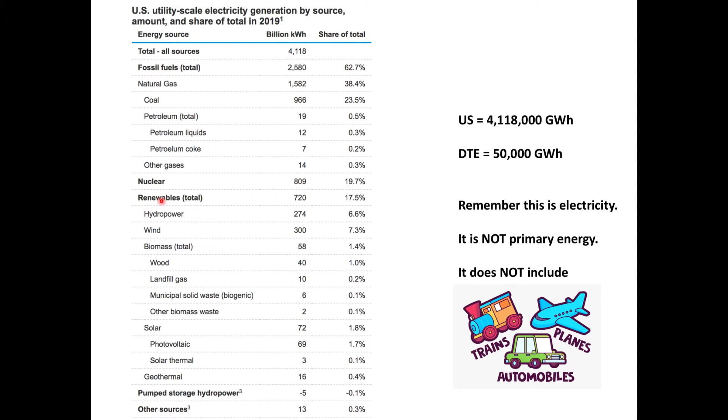So today I want to focus on nuclear and I want to focus on hydropower. And remember, one of the themes of these last few lectures in the class is that if you imagine a world that is truly independent of fossil fuels, meaning that we don't use any coal, any natural gas, or any oil as a primary energy source, just for electricity, we have to replace this 63%, which is a significant amount of energy that needs to be replaced, by either nuclear plus renewables, or according to the new Green Deal, no nuclear, no fossil fuels, and all renewables.

And if you notice, since about 1990, it has remained steady at about 20% of U.S. electricity production. And you can think of this as a plateau for reasons I'll go into later in the lecture today. One of the things that makes nuclear so challenging in the United States and other developed countries and developing countries is that on a dollar-for-dollar basis, nuclear is very expensive.

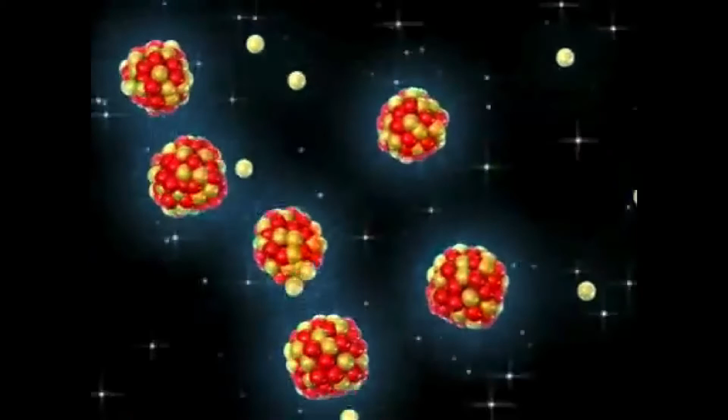Nuclear fission is the splitting of a heavy element's nucleus to form two new elements with smaller nuclei. One of the most important fission reactions is that of uranium-235, which is used in nuclear reactors and atomic weapons. The fission of uranium-235 is initiated when a neutron traveling with enough velocity collides with the uranium-235 nucleus. The collision produces U-236, which immediately splits into two lighter elements such as krypton-91 and barium-142. The fission event also releases 3 neutrons and energy. The 3 neutrons are capable of initiating more fission events if they encounter a uranium-235 nucleus. If a sufficient or critical mass of uranium-235 is present, the reaction becomes self-sustaining, resulting in the release of massive amounts of energy in the form of heat, light, and ionizing radiation, an atomic explosion.

So let me walk back through this. And we're going to start here by looking at a uranium-235 atom. And I just want you to keep in mind the 235 refers to the total atomic mass, the number of protons and neutrons within the nucleus of uranium, the electrons effectively having no mass that is measurable. And what happens when a neutron from outside uranium-235 is forced into the core or the nucleus of a uranium-235 atom is that immediately the overall number of neutrons increases, and that causes the new atom uranium-236 to become instantaneously unstable, and it disintegrates or radioactively decays or breaks apart.

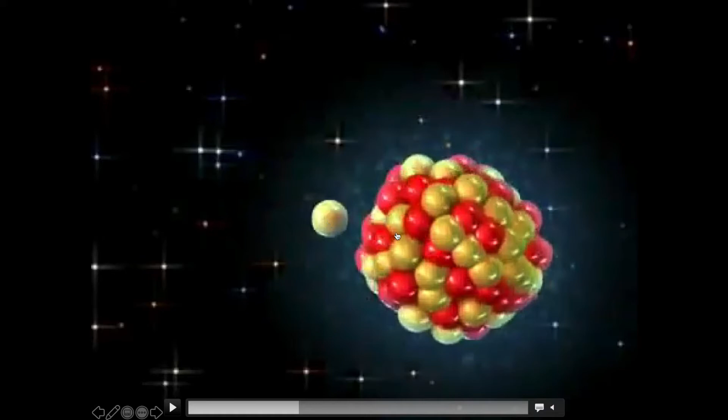Now, if you can remember hearing about Albert Einstein and his famous equation E equals mc squared, what happens when the accelerated neutron is forcibly injected into the uranium-235 atom, creating uranium-236, is that uranium-236 immediately radioactively disintegrates, and 2 new atoms, one of which is the element krypton, and the second is the element barium, are formed, and 3 neutrons that were originally in uranium-235 are released. Now, according to Einstein, E equals mc squared. So when this reaction occurs, the mass of krypton plus barium plus these 3 neutrons is less than the original mass in uranium-235 and uranium-236. So that means that energy is liberated during this radioactive decay process.

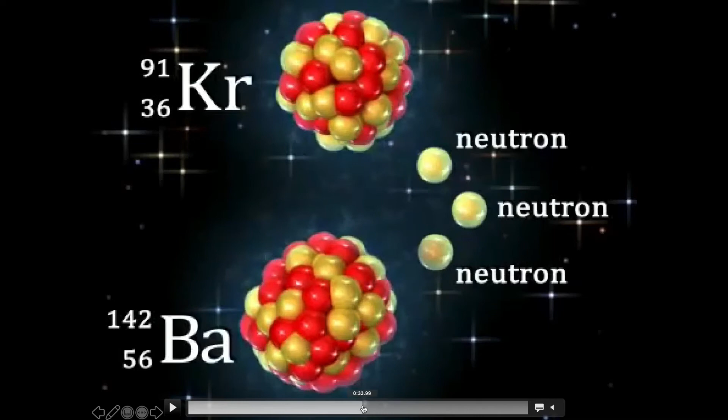These 3 neutrons then are free now in a nuclear reactor to interact with 3 more atoms of uranium-235, which then produces more krypton and more barium. And each of those 3 atoms of uranium-235, when it becomes uranium-236 and experiences radioactive decay, releases 3 more neutrons. So this is, in essence, a self-sustaining process where all atoms of uranium-235, each time they undergo radioactive decay or fission, produce krypton plus barium plus more neutrons.

And the way that nuclear power plants work, and I'll show you a video to highlight this, is that you start with a certain amount of uranium-235 at the beginning of electricity production, and then you routinely, every 1 to 1.5 years, have to replace more uranium-235, because once uranium-235 experiences fission, it is never again uranium-235. That is an irreversible process.

Now, in terms of electricity, what makes this so important is highlighted here, as was shown in the video, where we have an atom of uranium-235, a neutron is absorbed into the nucleus of uranium-235, making uranium-236, which is instantaneously fissionable, meaning it breaks apart to produce barium and krypton, releasing those 3 neutrons. According to E equals mc squared, when uranium-236 disintegrates into barium and krypton and 3 neutrons, 1 atom of uranium-235 that we start with releases

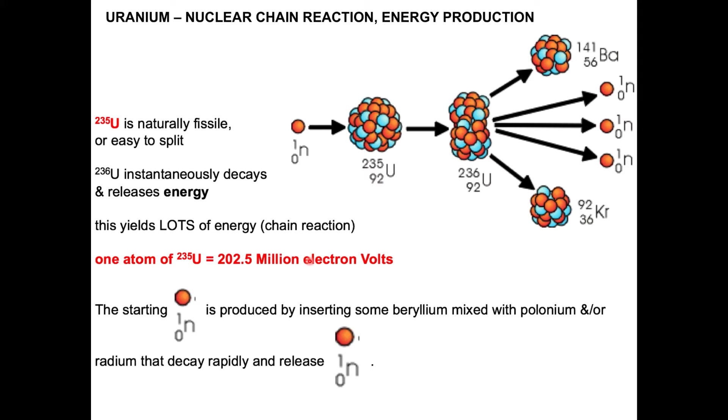202.5 million electron volts. So think about outlets in your house that might have 110 volts or 220 volts. 1 atom of uranium-235 releases slightly more than 200 million electron volts, which means that uranium is among the sources of energy that humans consume. It has the highest energy density of any fuel. So if you look at the photograph at the top, you can see a person's hand, and they're holding a pellet of nuclear fuel, and a typical pellet contains about 7 grams total mass, and it contains enough energy, or an equivalent amount of energy, in that tiny pellet that's being held here in the hand.

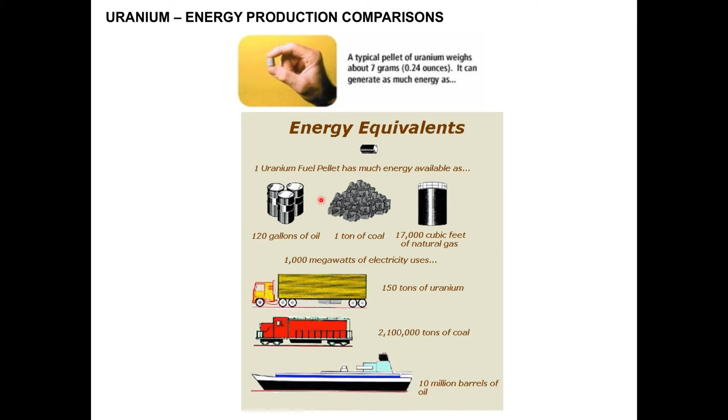It contains as much energy as 120 gallons of oil, a ton or 1,000 kilograms of coal, and 17,000 cubic feet of natural gas. So the takeaway message here is that an incredibly small amount of uranium-235 is equal to very large amounts of oil, coal, and natural gas.

The history of nuclear energy in the United States, and globally for that matter, is a function of World War II. And I won't go into the details there, but if you've heard of things such as the Manhattan Project that ultimately led to the catastrophic destruction of parts of Japan during World War II, that scientific discovery during World War II that uranium-235 undergoes fission and disintegrates was ultimately used to build nuclear power plants that were used by the Department of Defense. And I'm not going to go into the details here, but I'd encourage you to look this up, and you can find great videos online.

Now the reason this was done is into and after World War II, the way that submarines operated was a combination of diesel engines and battery storage. Now diesel, remember, is a fossil fuel. It's a specific hydrocarbon that we find in oil or in petroleum, and that diesel fraction is separated from oil.

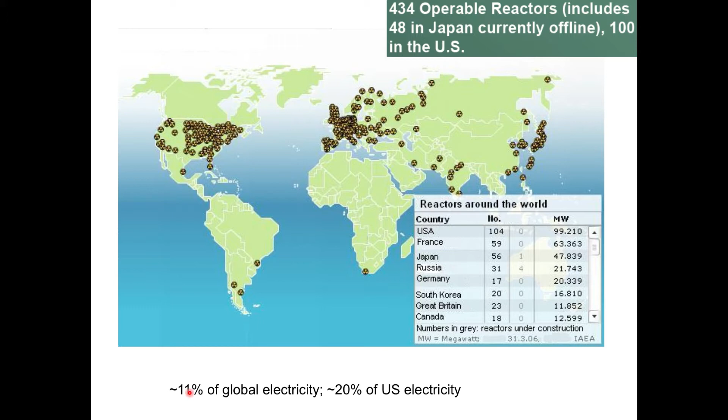And when we look around the world, or here in particular in the United States, in the Rocky Mountain region, so this part of the western United States, much of the Rocky Mountains are composed of the rock granite. And what happens on geologic timescales, similar to the way that we discussed bauxite forming earlier in the class, rainwater percolates into the granite. Now remember, with bauxite, the way that formed is the rainwater percolates in and removes everything except aluminum. So by mass balance, aluminum builds up in concentration to form bauxite.

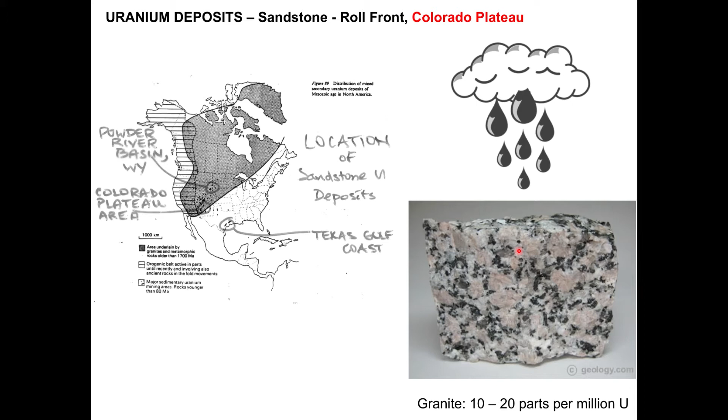Those are referred to by geologists as aquicludes, meaning that water is not able to percolate through clay because clay is very impermeable. It has high porosity, but it has almost no permeability. And when that groundwater flows through granite and then moves into a geologic unit that might contain a lot of sand, that sand is very porous and very permeable, and that is what geologists refer to as an aquifer, where all of the pore space within the sand contains water, and that can be an aquifer that we could put a pipe into and we could build a well to use that water for agriculture or human consumption.

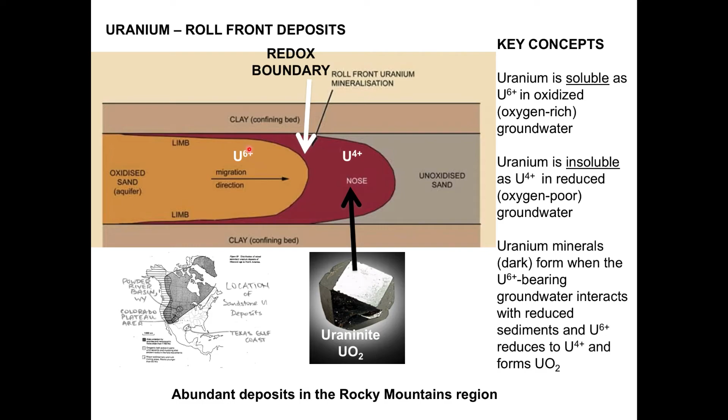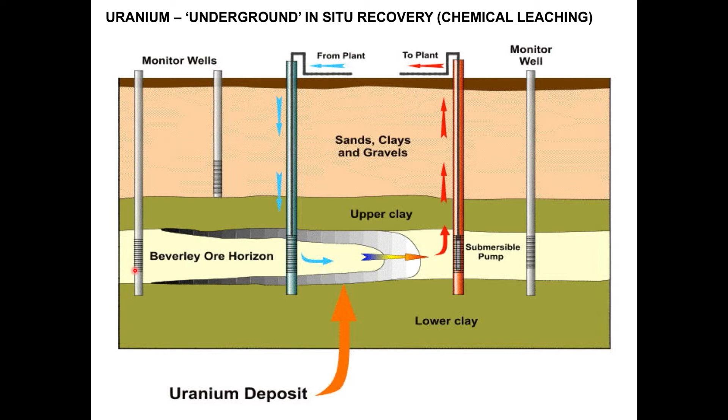Now, of isotopes of uranium, there are 3 major isotopes. The most abundant by proportion is uranium-238, that constitutes about 99.3% of all uranium atoms. Uranium-238 is not fissile. So uranium-238 cannot be used to produce electricity in conventional nuclear power plants. Only uranium-235 is fissile, and uranium-235 accounts for about 0.7% of all uranium atoms in any particular sample in an ore deposit or in the production fluid.

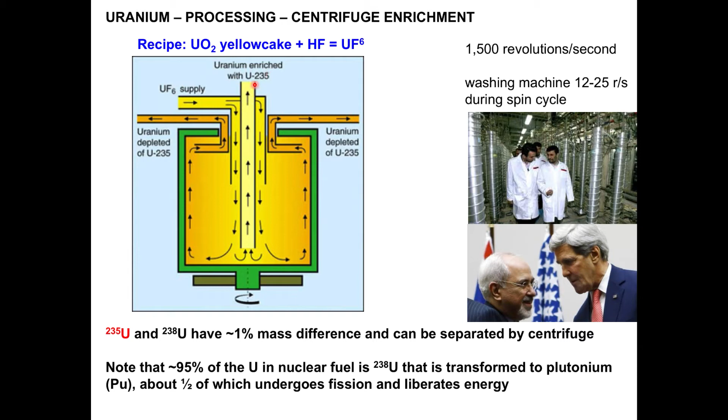Now the centrifuge is spinning so fast that what happens within the centrifuge is uranium-238, because it's heavier, is pushed to the outside of the centrifuge, whereas uranium-235, because it's lighter, concentrates in the center of the centrifuge. So then the gas in the center of the centrifuge is extracted via this pipe in the middle, and that now allows an enrichment of uranium-235. And this here in the center is what is then used to produce nuclear fuel pellets.

So I'm going to show you a video now of how a nuclear reactor works, just to give you a sense of what happens when that nuclear pellet is put inside a nuclear reactor.

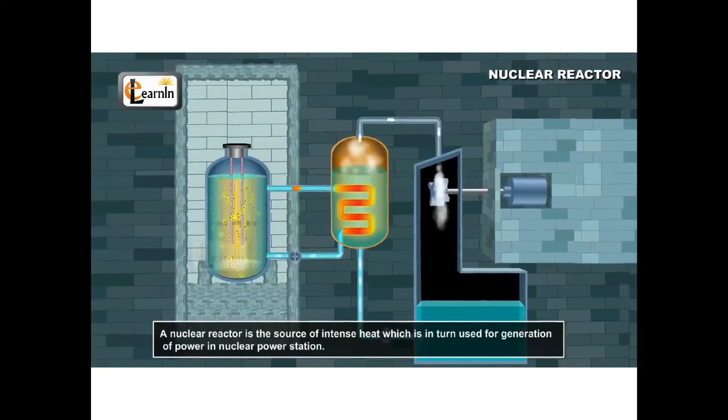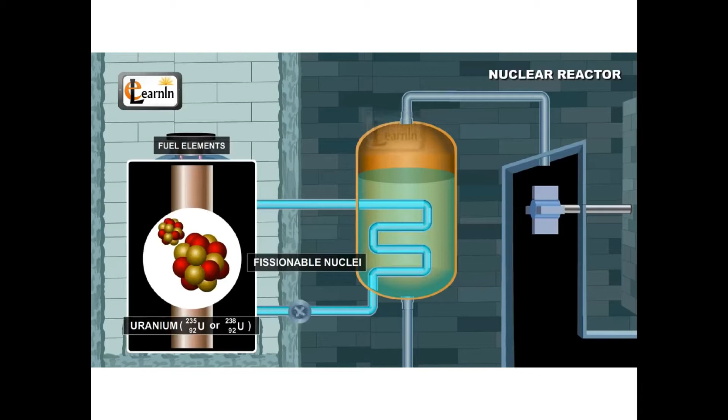Nuclear reactor. In this video, we're going to learn about the nuclear reactor. Nuclear reactors are the modern-day devices extensively used for power generation, as the traditional fossil fuels, like coal, are at the brink of extinction. A nuclear reactor is the source of intense heat, which is in turn used for generation of power in nuclear power stations. Its mechanism is similar to that of a furnace in a steam generator. The steam is used to drive the turbines of the electric generator system. A nuclear reactor consists of 3 crucial components: fuel elements, moderator, and control rods. Fuel elements come usually in the shape of thin rods of about 1 centimeter in diameter and contain fissionable nuclei like uranium-235 or uranium-238.

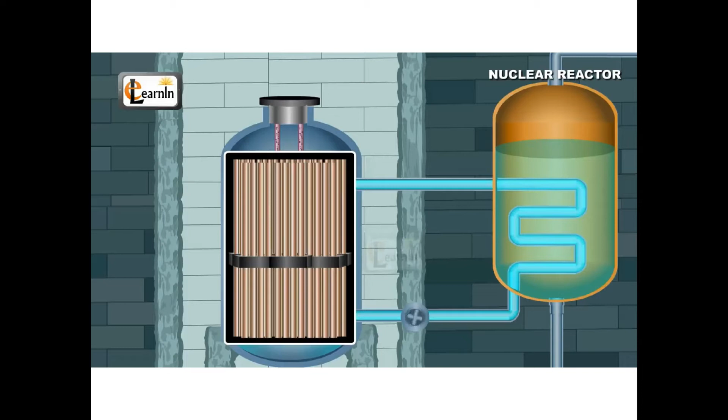These rods vary in number according to the size of the reactor. In large power reactors, thousands of fuel elements are placed close to each other. This region where these fuel elements are placed is called the reactor core. These fuel elements are normally immersed in water, which acts as a moderator.

The objective of a moderator is to slow down the energy neutrons in a nuclear reactor, which are produced during the nuclear fission process by the fuel elements. Thermal neutrons, which are the neutrons with energy of about 0.04 electron volts, are capable of producing fission reaction with uranium-235. During the fission reaction process, new neutrons are given out, which have energies of about 1 MeV. This is 1 mega electron volts.

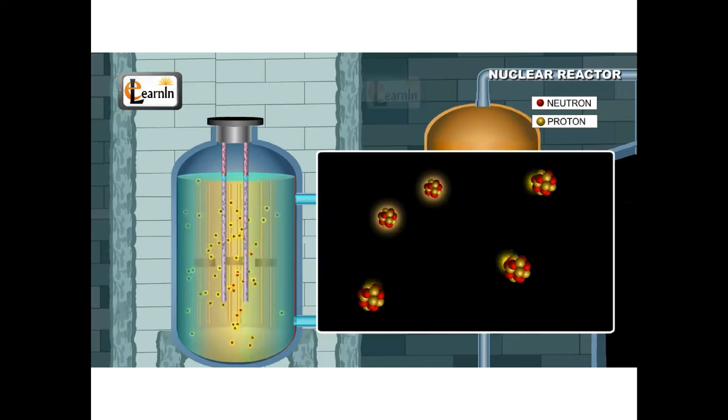These neutrons typically escape from participating in another fission process, as they are accompanied by enormous energy release. In fact, the probability of these neutrons producing another fission reaction is 500 times less than that compared to a thermal neutron. This is where a moderator is extremely useful. Moderators have the capability to slow down, or in other words, moderate, the speeds of these high-energy neutrons so that they can in turn be used for a chain reaction to trigger multiple fission reactions of other uranium-235 nuclei.

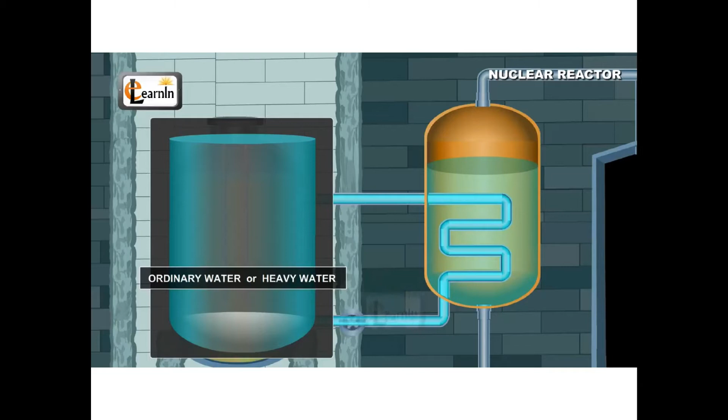Commonly, ordinary or heavy water is used as a moderator in nuclear reactors because of the deuterons present in them, which are capable of slowing down the neutron's speed. Water molecules in the moderator are useful in slowing down the high-energy neutrons, which leave the fuel element after nuclear fission. These high-energy neutrons collide with water molecules, thereby losing out on some energy with every collision and therefore slowing down substantially. A new fission reaction can now be triggered using this slow neutron by striking it with the fuel element.

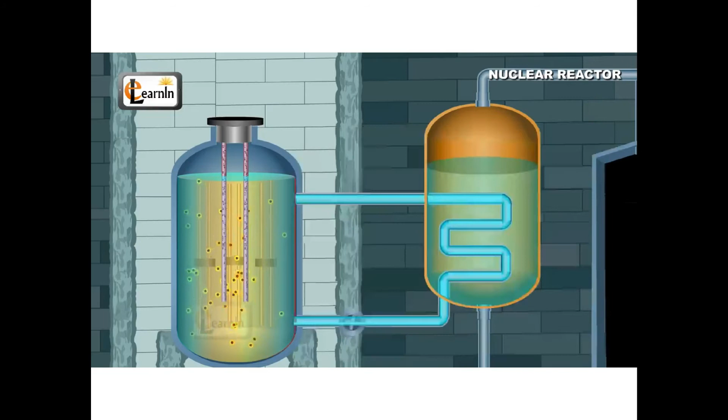The third and most prominent part of a nuclear reactor are the control rods. In order to get a steady output of energy from the nuclear reactor, every single fission reaction should trigger another fission reaction and ensure the availability of spare neutrons released to trigger the chain reactions. By controlling the number of spare neutrons available at any given time, the rate of nuclear fission chain reactions can be controlled. This control on the fission reaction can be maintained using control rods.

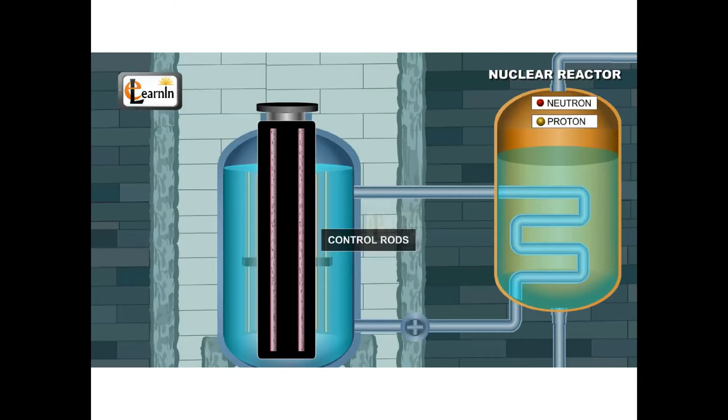The main function of the control rods is to absorb any excess or spare neutron in the moderator in order to prevent any further fission reactions. Usually, such control rods are made of boron or cadmium. To increase the rate of fission reactions, these rods can be removed from the moderator. A steady output of energy can thus be maintained by inserting or removing the control rods in the nuclear reactor.

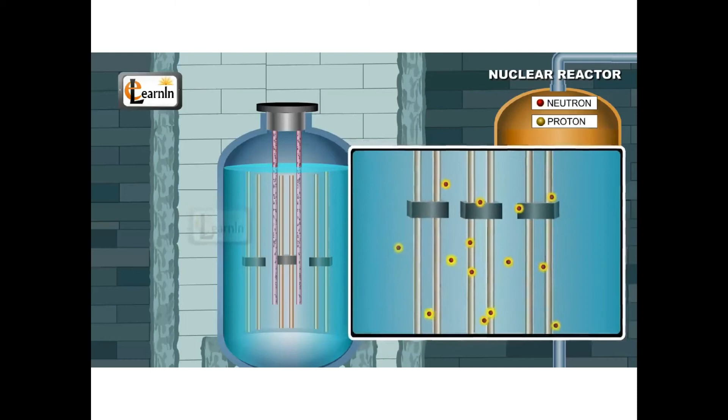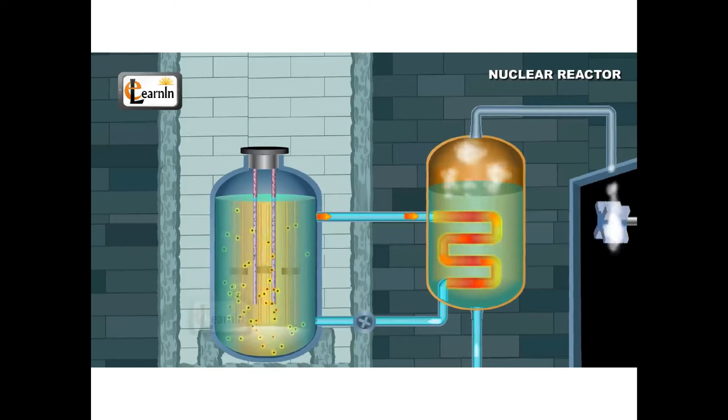Now that we know the components of a nuclear reactor, let's understand the working of a nuclear reactor. It's usually enclosed in a shield made of thick concrete walls. It consists of a reactor core, pump, and heat exchanger. The reactor core and pump are placed in contact with the water, which is usually the coolant in these reactors.

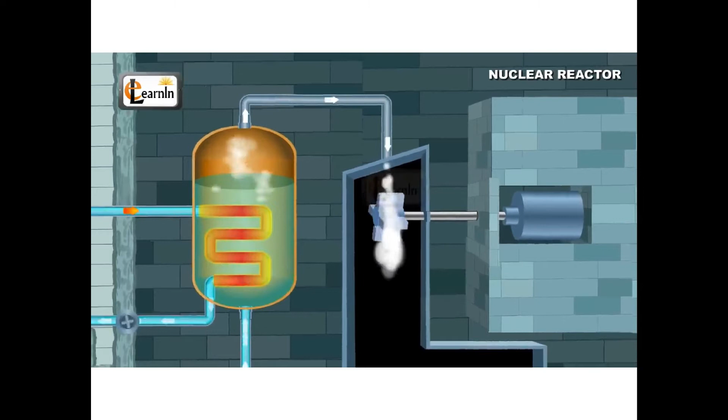Due to the enormous amount of heat released during the fission reaction, the surrounding water gets heated up and changes to steam, which is in turn used to turn the turbines. So, huge heat energy gets converted into electrical energy. Water is continuously flown in and out of the nuclear reactor using the pump. So, a nuclear reactor successfully generates nuclear energy from fission reaction.

So this is not a class on nuclear energy, and I'm not going to hold you to much of what was in the video. I'll give you what I think are the highlights, but hopefully the video was somewhat interesting and makes nuclear reactors a little more transparent. This would be the nuclear core here, and we have these rods, and those rods contain the fuel pellets, and inside the fuel pellets we have atoms of uranium-235 that are fissionable.

The rods are surrounded by water, and all of the little atoms here, think of those as the neutrons and energy that are being released during fission. That energy, or some proportion of that energy, will be absorbed by the water. So cold water is pumped in here at the bottom. That water becomes warm, and you can see the warm water then is piped out here at the top,

and it goes into what we call a heat exchanger, where this pipe that I'm tracing over here is all self-contained, so the water stays within that pipe. Then what occurs is inside the heat exchanger, this is a cylinder that contains water that surrounds this pipe that now has hot water. So cold water becomes hot by absorbing energy released during the fission of uranium-235.

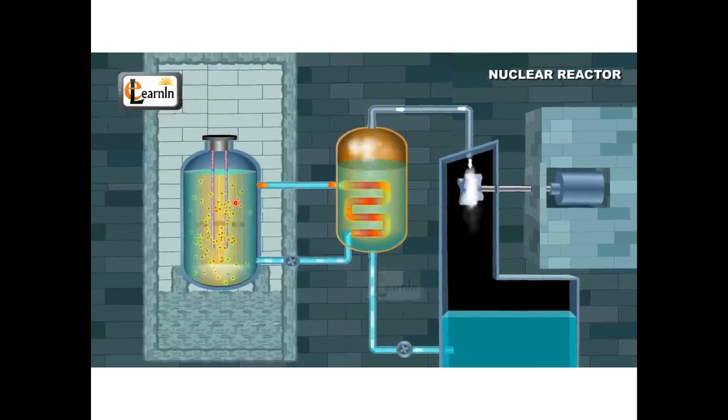And I didn't go through the details in the lectures on fossil fuels, but in a natural gas power plant or a coal-fired power plant or an oil-fired power plant, the process is exactly the same as everything shown here, except natural gas or oil or coal are combusted to heat the water. So in this case, uranium-235, it's the energy that's released during fission that allows us to produce electricity.

Now I mentioned the centrifuge, and the centrifuge is used to separate uranium-235 from uranium-238, so it increases the proportion of uranium-235. The reason that's important is shown here on this slide, where the bottom x-axis is the uranium-235 content, the percentage of all uranium atoms that are present in a particular fuel rod. And what you can see is that conventional nuclear power plants use fuel rods that contain 4 to 5% uranium-235.

If you continue to increase the proportion of uranium-235 to about 20%, so again, this would be, let's say, 5% uranium-235, 95% uranium-238. Here we would have 20% uranium-235, 80% uranium-238. Those are used in what we call research reactors at universities and medical centers. If you continue to increase the proportion of uranium-235 to 90%, so 90% uranium-235, 10% uranium-238, that is the uranium mix that's used for nuclear warheads.

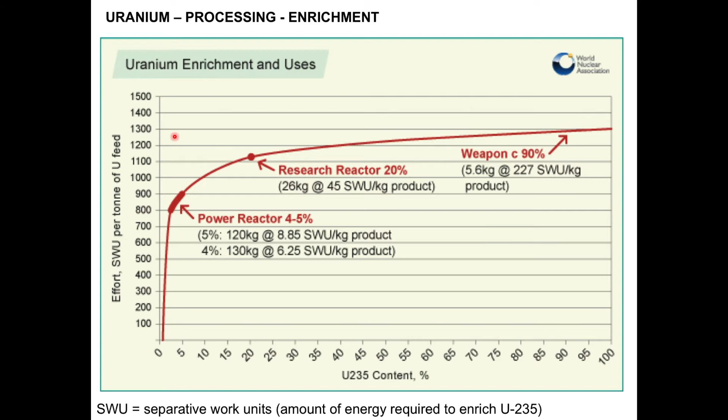One of the concerns around the world is that the y-axis here, think of that as the total amount of energy, centrifuging energy, needed to increase the uranium-235 to 5%. And notice that the difference between the amount of energy to go from 0.7% uranium-235 at the bottom to 5% uranium-235 here, to get to 90% is less than 50% more energy.

So what you see in the news frequently is a lot of concerns about countries that do not currently have nuclear power programs. What might happen if a country develops a nuclear power program for the purpose of generating electricity? And could that country then develop nuclear warheads?

Among the concerns in the United States and in the European Union is nuclear power plants are getting old. More than half of all nuclear power plants in the United States are older than 30 years, and most of the remaining reactors, the other half, are at least 20 years old. Now, when nuclear power plants are built, they're initially designed for lifetimes of somewhere between 30 and 50 years, and they can actually last longer. They can go through a re-permitting or a re-licensing process, which is closely scrutinized by the federal government.

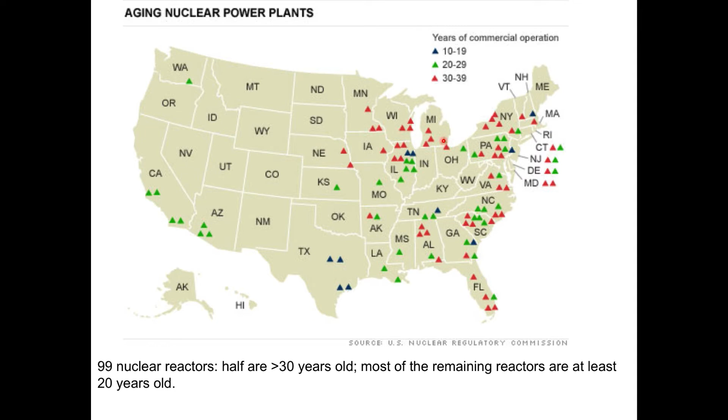But I just want to give you a sense here. If you look at the red triangles, all of the triangles here represent nuclear power plants. The ones in red are the oldest power plants. You can see very few power plants younger than 20 years. So remember that nuclear power generates about 20% of U.S. electricity. As these nuclear power plants age and eventually will have to be decommissioned, then another energy technology has to be used to produce new electricity to replace the nuclear power plant that is taken offline, referred to as decommissioning.

If anybody has seen the 5 or 6 part series called Chernobyl on HBO, I saw it. I think it's a great series. My 15-year-old daughter watched it with me, and she also thought it was pretty captivating.

But Chernobyl occurred only a few years after Three Mile Island, and this is a disaster that occurred in the former Soviet Union, and it also was another nail in the coffin for social license. And I'm just going to play you a short video here if you haven't seen Chernobyl to get a sense of what happened and why people are concerned.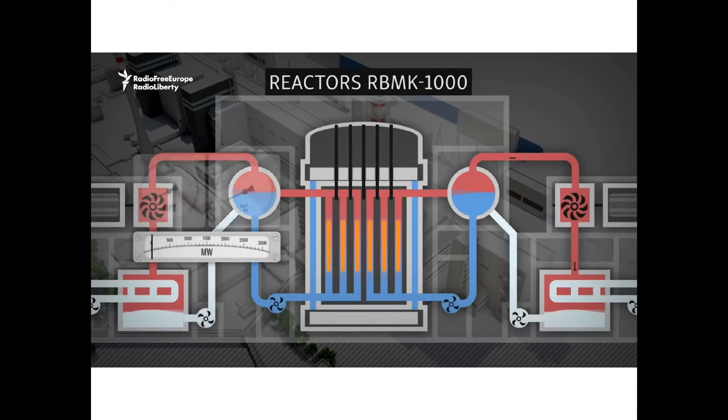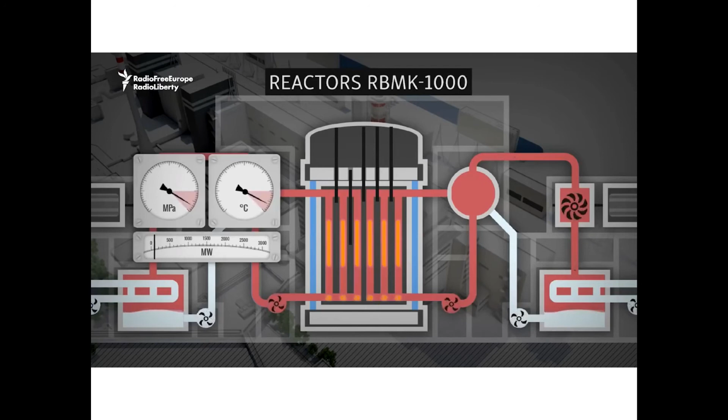drill went horribly wrong. A nuclear reactor is like a giant steam engine. Uranium fuel rods react to produce a massive amount of heat. That converts water into steam, which drives huge turbines to generate electricity. Control rods are inserted in between the uranium to slow the reaction. And it's crucial for cooling water to be pumped around the core to prevent overheating. But as the tests began, almost all of the control rods were removed, and technicians lost control of the flow of coolant. Temperatures soared, and extreme heat began to melt the core. At 1:23 a.m., Reactor 4 exploded. It spewed 8 tons of radioactive debris into the atmosphere.

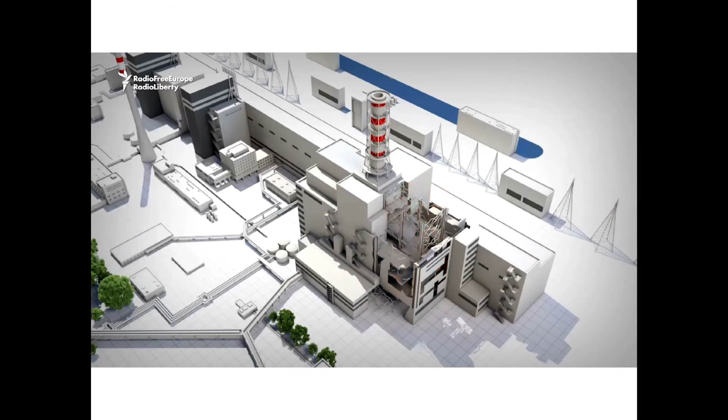115,000 people were evacuated from a 30-kilometer zone around the plant. The battle to put out the fires inside lasted for 15 days. More than 500,000 military and civilian personnel were drafted to deal with the accident and its aftermath. 31 of the initial firefighters and plant workers died within days from acute radiation sickness. The toxicity of the radioactive cloud was equivalent to 400 Hiroshima atomic bomb explosions. Crews hastily built a concrete sarcophagus to encase the entire reactor to prevent more radiation from spreading. Inside, there remained 200 tons of radioactive fuel. The remaining 3 reactors continued to operate due to energy shortages in Ukraine. It wasn't until the year 2000 that the Chernobyl complex was completely shut down.

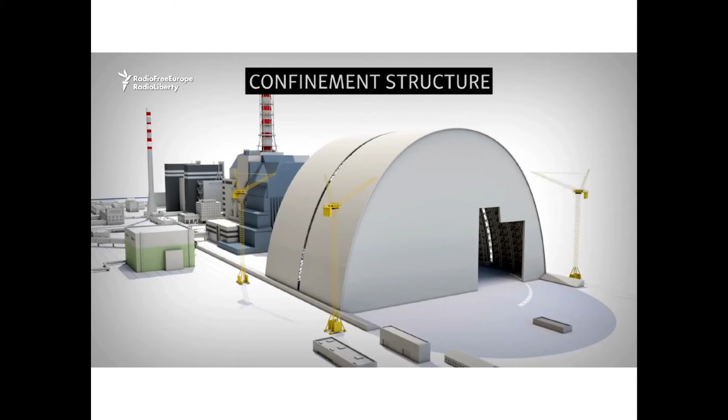With the concrete sarcophagus crumbling, the international community began to build a new confinement structure for Reactor 4. It stands 110 meters tall, higher than the Statue of Liberty, and it's wide enough to fit a ship the size of the Titanic. At a projected cost of $3 billion, construction is scheduled for completion in 2017. One of Chernobyl's iconic red and white chimneys will be dismantled, and the massive steel dome will slide over reactor number 4. The confinement structure is expected to last for at least 100 years.

So this video actually does a little bit of a better job than the series Chernobyl. And I love the dramatic music. It's always amazing how great that is.

But this failure of the reactor, and I was a kid when this happened and it was all over the news, this failure of the reactor is what literally scared the bejesus out of people around the world and caused the social license for new reactors to plummet. And as a result, not a single new reactor has been built since then in the United States and most other developed countries in the European Union. So then the third nail in the coffin was Fukushima.

So if you look here at the image center, this is northern Japan, north of Tokyo. And if you look here, what happened at Fukushima was an offshore earthquake that had a magnitude of about 9. Now, the highest magnitude earthquake theoretically possible is a magnitude 10. So this is one of the largest earthquakes ever recorded or known by geologists to have occurred on planet Earth.

And that magnitude 9 earthquake sent a massive tsunami towards the coast, towards Fukushima. And the Fukushima power plants here are right along the coast. So now if you look to the left side, you can see the 4 reactors, number 1, number 2, number 3, number 4. And what occurred is the failure of the backup cooling systems.

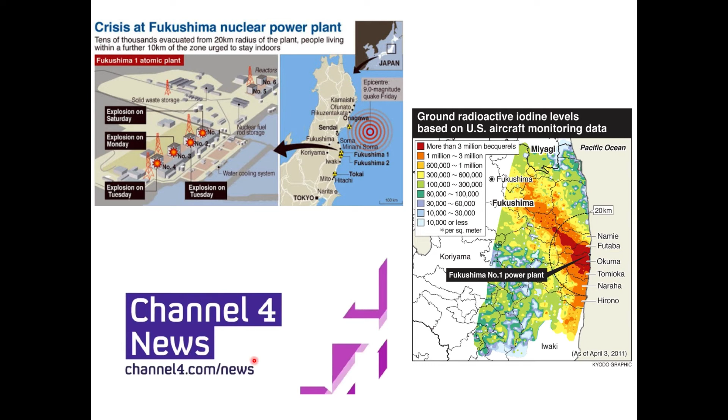So if you remember that video I showed you a few minutes ago, they described the need to have both control rods and also cooling systems. And the coolant here, the backup coolant systems failed, which caused explosions at the Fukushima power plant. And I'll show you in the bottom here a video that presents the explosion.

So you're looking here, if I stop this for a second, you're looking in the background at, this is obviously onshore Japan. Here we have Fukushima and we have the reactors 1, 2, 3, 4. This is the Pacific Ocean in the background, and these are towers here that have electricity lines. And watch what happens as I push play.

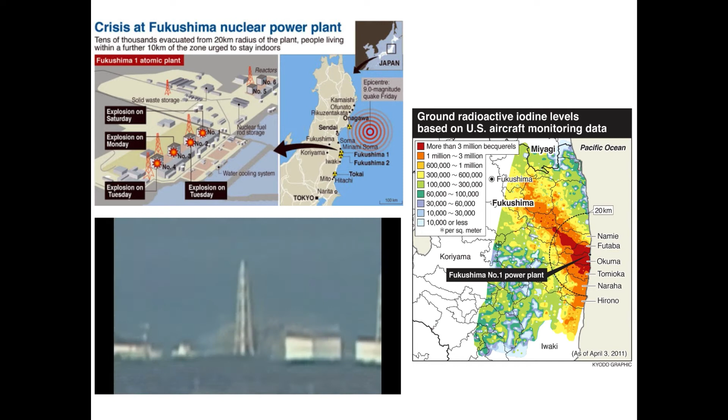No dramatic sound on this one, but that cloud is literally a cloud created by the explosion of the nuclear fuel rods in the core of the reactors. Now, in addition to uranium-235, which is the fuel used for nuclear electricity, this also releases a phenomenal amount of additional radioactive material. And on the right-hand side over here is a map of radioactive iodine.

And all I want you to see, if we focus in on this area on the right-hand side where the nuclear power plants were located, this is back to the comment, dilution is not the solution to pollution. That radioactive material that was blasted into the atmosphere has now contaminated a significant part of Japan in this area and has also been detected globally because we know the atmosphere convects material around the planet.

Other challenges, and this is a map to highlight the challenges that Fukushima had here top right. So at the top we have nuclear power plants around the world built in earthquake zones, and on the bottom the green and red colors indicate areas that are seismically active, meaning there has been an earthquake since 1973.

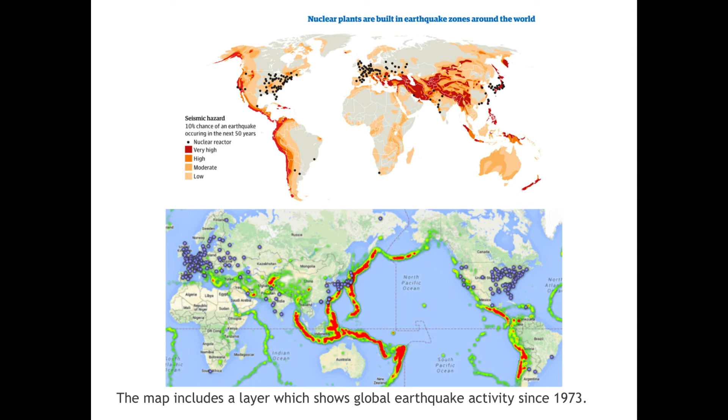So if you look at all of the power plants here in Japan and other parts of Southeast Asia, and you look at some of the power plants here in the Mediterranean region, which is earthquake prone, there's a concern that the exact same problem that occurred at Fukushima could happen elsewhere. And that is what has driven social license close to zero in many countries.

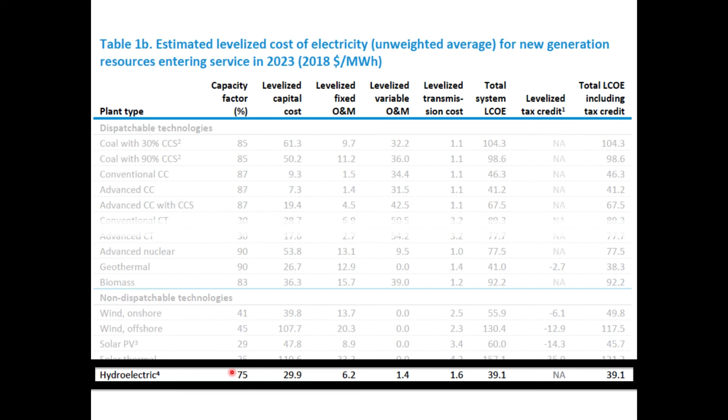Hydroelectric is also a relatively inexpensive way of generating electricity, and it has a number of negative impacts on the environment that also have led to a decreased social license to build new hydroelectric in most countries around the world. So where does hydropower come from?

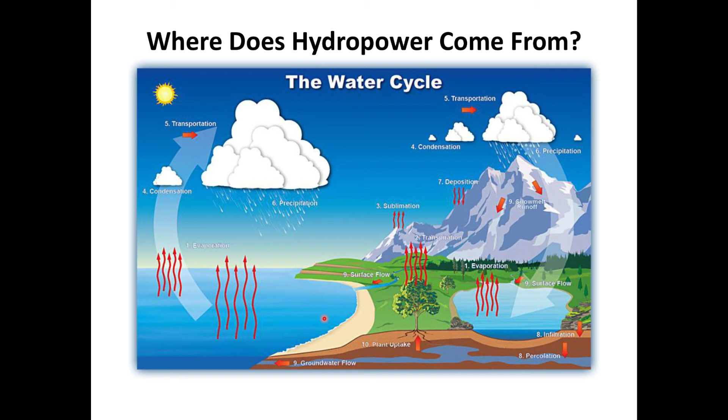In the second grade, if you grew up in the state of Michigan, you learned about the water cycle. And all I want to do is just remind you that the water cycle is one where incoming sunlight warms up the ocean, water evaporates, the ocean water that's evaporated comes over land, falls as precipitation, and flows back downhill towards the oceans. That's the water cycle in a nutshell. And that's how we use the water cycle to generate electricity. The water cycle is driven by solar radiation and gravity.

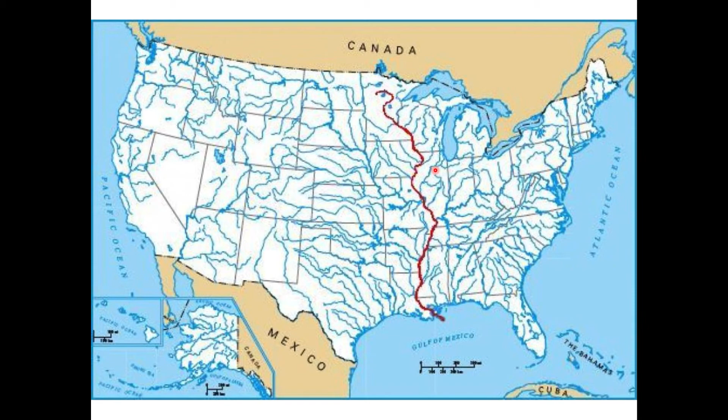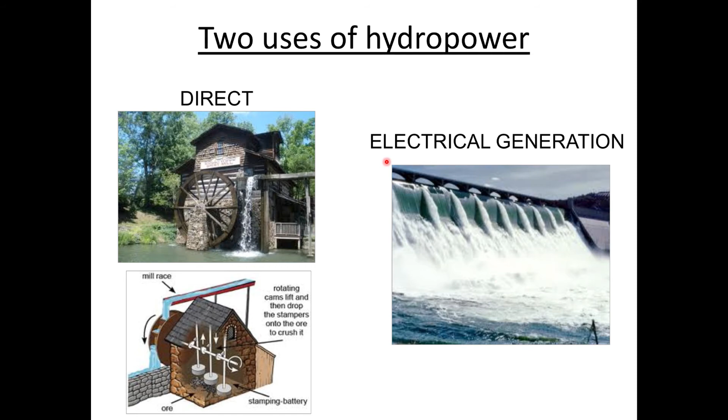And water wheels, as you can see on the schematic on the bottom, take advantage of an artificial topographic gradient where water comes in what's called the mill race, falls on the wheel, it spins the wheel here, and that wheel is connected to a shaft, and that shaft in this case rotates these stones, and this has been used to grind grain or to stamp batteries or other things for hundreds of years. What I'm going to focus on today is the use of rivers and hydropower to produce electricity.

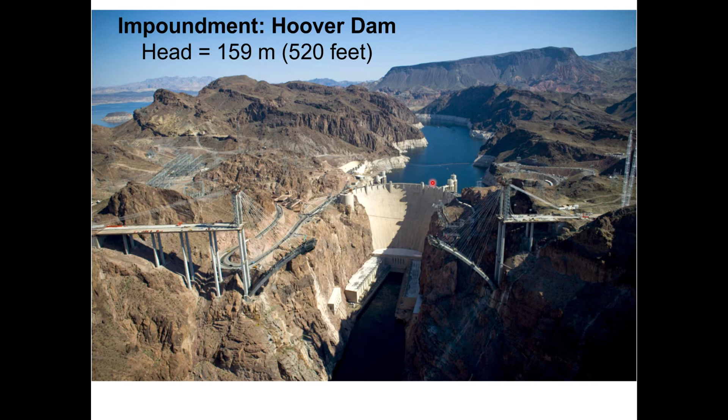And the dam is built such that water flows from high elevation here through the dam to low elevation, and at the bottom, that gravitational potential energy from the water that's flowing down this artificial hill is what we use to generate electricity. So I'll play a video now of how this process works.

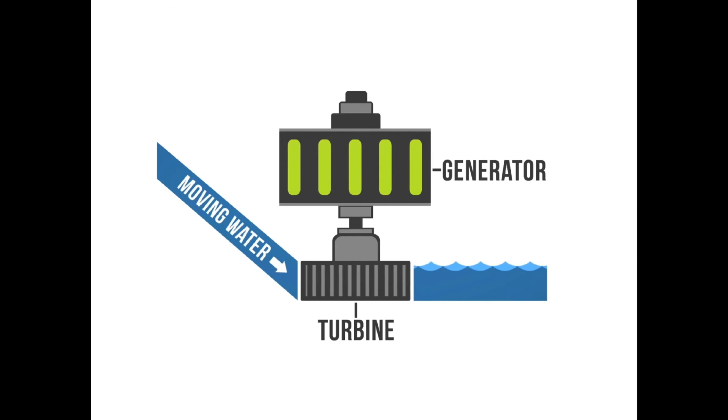Hydropower. Hydropower, or hydroelectricity, refers to the conversion of energy from flowing water into electricity. It is considered a renewable energy source because the water cycle is constantly renewed by the sun. One of the first uses of hydroenergy was for mechanical milling, such as grinding grains. But today, modern hydro plants produce electricity using turbines and generators. The mechanical energy created by moving water spins rotors on a turbine. This turbine is connected to an electromagnetic generator which produces electricity when the turbine spins.

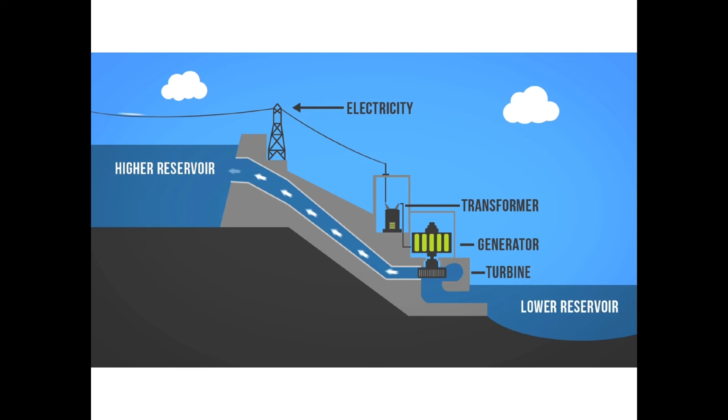There are two main types of hydroelectricity production: dams and run-of-river. Hydro dams utilize the potential energy from dammed water to produce electricity. A dam is a large barrier constructed to raise the level of water and control its flow. The elevation created by the dam creates gravitational force for turning the turbine when water is released. Some dams also contain an additional reservoir at their base where water is stored to be pumped to the higher reservoir for release when electricity is in demand. This is referred to as pumped storage hydro.

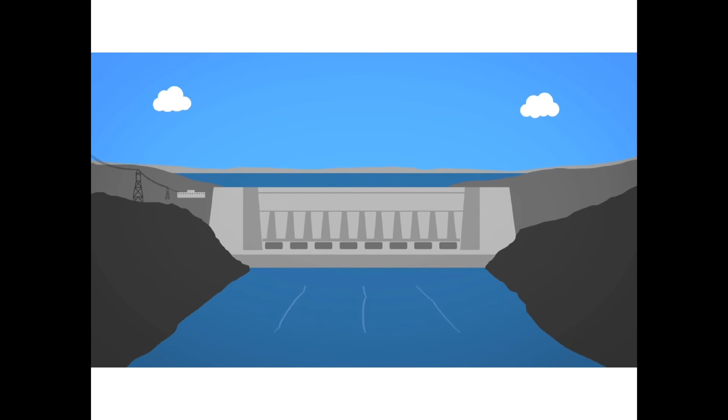The second form of hydroelectricity production is run-of-river hydro. Run-of-river still uses turbines and generators, but relies on natural water flow rates of rivers, diverting just a portion of the water through turbines. Because run-of-river hydro is subject to natural water variability, it is more intermittent than dammed hydro. There are various sizes of hydro plants that produce electricity. Large hydro, greater than 30 megawatts, small hydro, 100 kilowatts to 30 megawatts, and micro hydro, less than 100 kilowatts.

The Hoover Dam in the United States is a whopping 2,074 megawatts, which is enough to serve 1.3 million people. Of all renewable energy sources, hydropower holds the largest share of worldwide electricity production.

Hydropower has several benefits. It is a cost-competitive form of electricity, even though the initial building cost can be high. It is quite reliable compared to other renewable options and pairs well with other sources as it can be used as baseload power. In some cases, dammed reservoirs can also help with flood control and be a reliable water supply for communities.

There are also some concerns with hydropower, especially when it comes to large dams. Damming a river has a major impact on the local environment, changing wildlife habitats, blocking fish passage, and often forcing people in riverside communities to move out of their homes. In addition, dam failures can be catastrophic, claiming the lives of those living downstream.

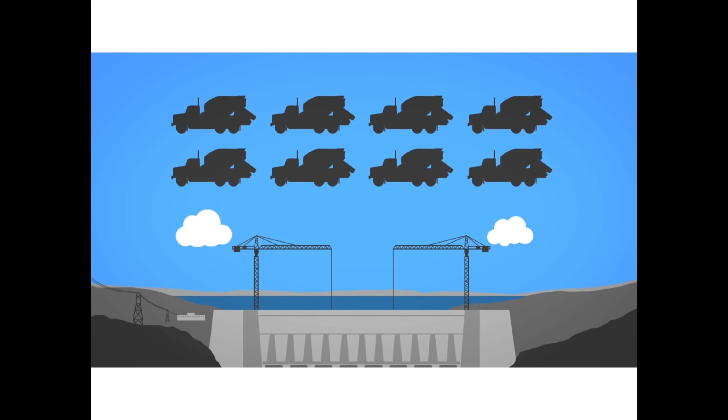Hydro plants are also not completely free of greenhouse gas emissions. As with most forms of energy, carbon dioxide emissions happen during construction, particularly due to the large quantities of cement used, and plant matter in the flooded areas makes methane, another greenhouse gas, as it decays underwater. That's hydropower.

So a couple of things I just want to go back and highlight that they mention here. One is the concept here of baseload power. Baseload power means that you can use it 24 hours a day, 7 days a week, 365 days a year. It doesn't care if the sun is shining or the wind is blowing.

So as long as you have water upstream, you can generate hydroelectric power. That's also how we describe natural gas and coal and oil and nuclear. They're baseload power because they work independent of the local weather.

One of the things that we know with respect to hydroelectric power, and I'll show you the equation in a few slides, is the larger the head, meaning the larger the distance between the top of the water on the upstream side of the dam and the downstream side of the dam, the larger this value of head is, the more power we can produce.

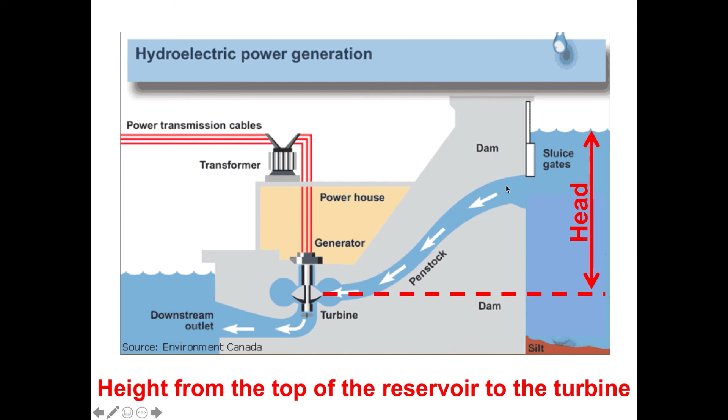So remember, in a nuclear power plant or natural gas or coal-fired power plant, we're using energy from those fuels to convert water to steam, and that steam drives the turbine. In this case, it's simply the gravitational potential energy of water falling through the penstock that turns the turbine.

So this is the equation I mentioned. The power, or the watts, that can be produced from a hydroelectric dam are the head, this vertical difference in height, times the flow rate times gravity, and flow rate is given in terms of units of water per time, so liters per second or cubic meters per second, and then the acceleration of gravity is a constant, 9.8 meters per second squared.

So gravity is a constant, and what is done is to build dams so they have as high a value of head as possible, and then you can control the flow rate so you can increase head and increase flow to increase the electricity production. And typically at hydroelectric dams, there are multiple turbines connected to multiple penstocks. So you might run one at a time, two at a time, three at a time, four at a time.

So in terms of that concept of baseload power, you could produce maximum power during the evening hours in July when everyone has their air conditioners on in Chicago, and then you can reduce the number of turbines that you use in the middle of the night when everyone's asleep and no one is using their air conditioners.

There are different types of dams, and I'm just going to give you a high-level overview of those here. An impoundment dam, the word top left, is where you completely block the river.

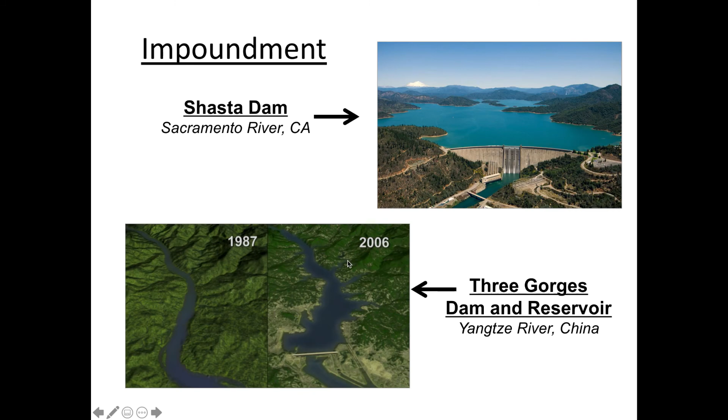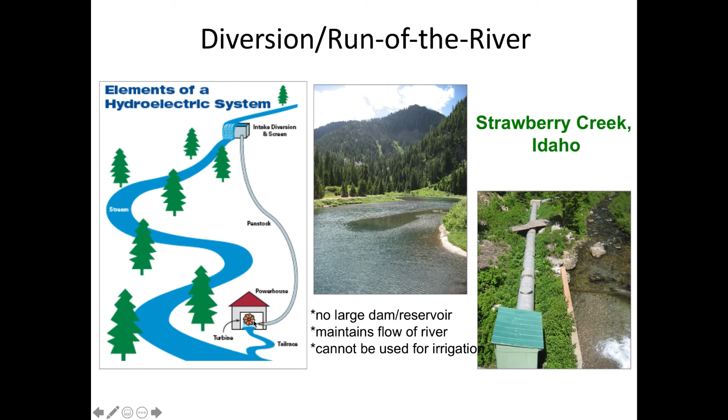The one mentioned in the video, this diversion or run of the river, all I want you to think here is small scale. So here we might have a stream like the one shown in the center, and often run of the river is built by building a pipe, for instance the one I show here on the right-hand side in the photograph, where you don't have a reservoir, but you allow water from the stream to enter the pipe, and on the left-hand side that pipe carries the water down into a powerhouse where it spins a turbine to generate electricity.

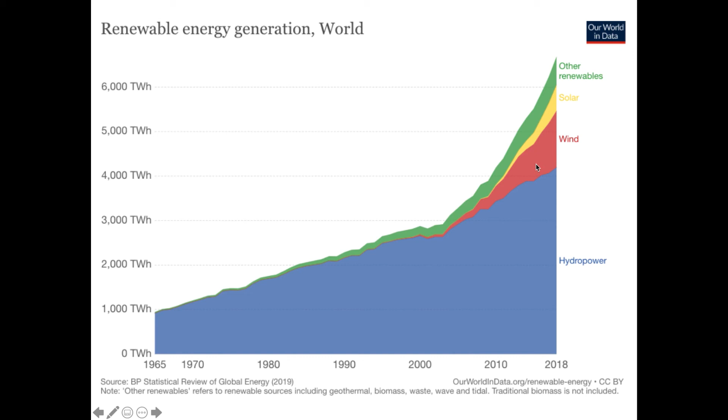Now, worldwide, in our lifetimes, hydropower has grown. In the United States, it effectively plateaued in your lifetime, and we haven't seen any significant new hydroelectric power. As the video mentioned, hydropower produces more renewable energy than any other renewable source. And what we do see is this growth, and that's because around the world there are specific areas that are building dams and increasing the amount of hydroelectric power.

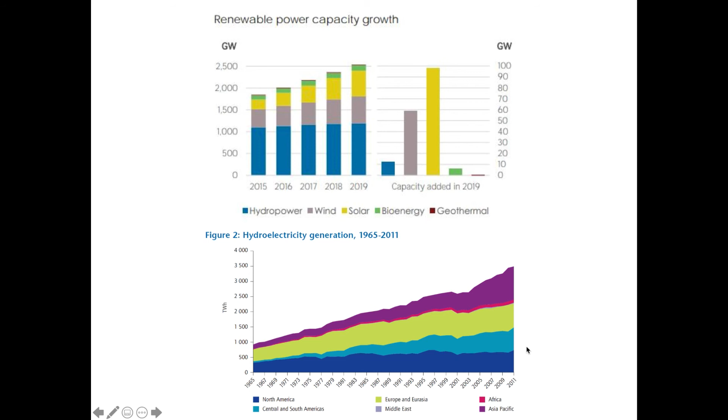And you can see that on the bottom over a longer time scale from 1965 to 2011. It's been relatively flat, although we do see a slight increase in certain regions of the world. Again, here are just more data. These are data from 2015 to 2019 that are used to forecast how much hydro will grow over the next 30 years. And you can see that a small amount of hydro growth is forecasted, but wind and solar, which I'll talk about in the next lecture, are expected to grow much faster.

This is just a snapshot of places around the world that are building hydroelectric, and right now China is building more hydroelectric capacity than any other country in the world. We have hydroelectric in our own backyard. So in the city of Ann Arbor, on the Huron River, there are 4 dams, and all 4 were historically used to produce electricity. 2 of them now, Barton and Superior, continue to produce electricity.

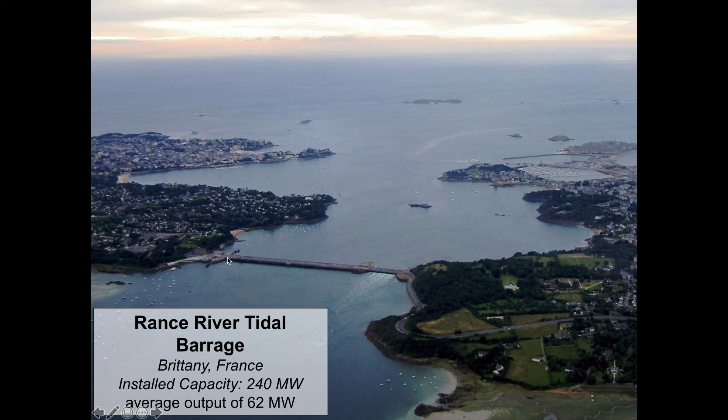So what are other ways to capture hydrothermal electricity, or capture and convert hydrothermal energy to electricity? One is known as tidal energy, and I'll show you, this is a photograph here of an area in northern France, and I want to focus your eyes here in the center on the bridge. That bridge sits on top of a tidal energy electricity production plant, and you'll see how that works in this video.

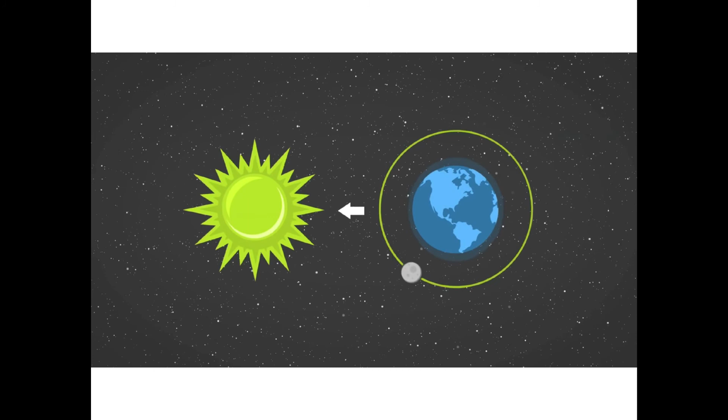Tidal power. Tidal power is a form of hydropower that converts the energy from the natural rise and fall of the tides into electricity. Tides are caused by the combined effects of gravitational forces exerted by the moon, the sun, and the rotation of the earth. Tidal plants can only be installed along coastlines. Coastlines often experience 2 high tides and 2 low tides on a daily basis. The difference in water levels must be at least 5 meters high to produce electricity.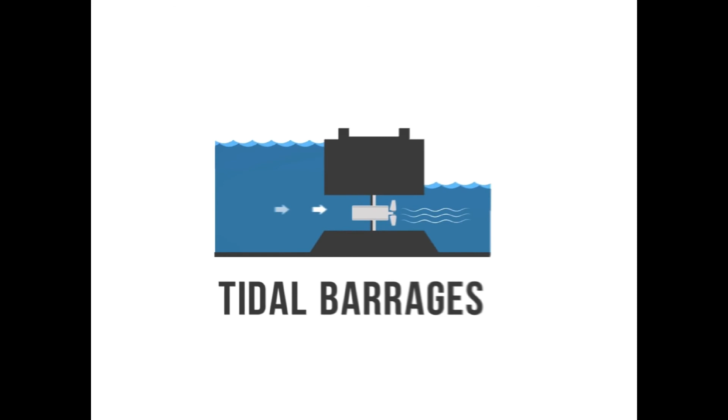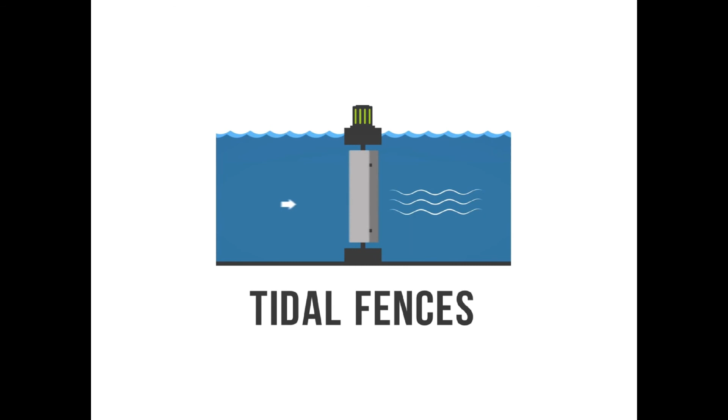Tidal electricity can be created from several technologies, the main ones being tidal barrages, tidal fences, and tidal turbines. Tidal barrages are the most efficient tidal energy sources. A tidal barrage is a dam that utilizes the potential energy generated by the change in height between high and low tides. This energy turns a turbine or compresses air, which in turn creates electricity. Tidal fences are turbines that operate like giant turnstiles, whereas tidal turbines are similar to wind turbines, only underwater. In both cases, electricity is generated when the mechanical energy of tidal currents turns turbines connected to a generator.

The generator produces electricity. Ocean currents generate relatively more energy than air currents because ocean water is 832 times more dense than air and therefore applies greater force on the turbines. Tidal power is easy to install and renewable, having no direct greenhouse gas emissions and a low environmental impact. Because the ocean's tidal patterns are well understood, tidal energy is a very predictable energy source, making it highly attractive for electrical grid management. This sets it apart from other renewables that can be more unpredictable.

However, adoption of tidal technologies has been slow, and so far the amount of power generated using tidal power plants is very small. This is due largely to the very specific site requirements necessary to produce tidal electricity. Additionally, tide cycles do not always match the daily consumption patterns of electricity and therefore do not provide sufficient capacity to satisfy demand. That's tidal power.

So what the video shows you here is we're taking advantage of low tide and high tide. So as long as you've got a 15-meter difference between high tide and low tide, if we look at the tidal barrage, notice what's happening here. The water comes in and spins the turbine, and the water comes out and spins the turbine.

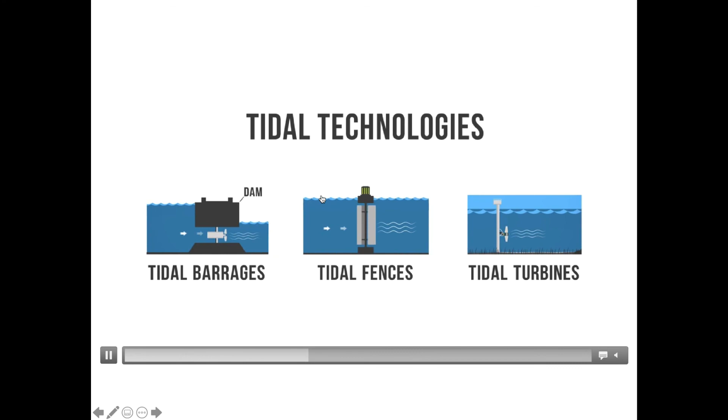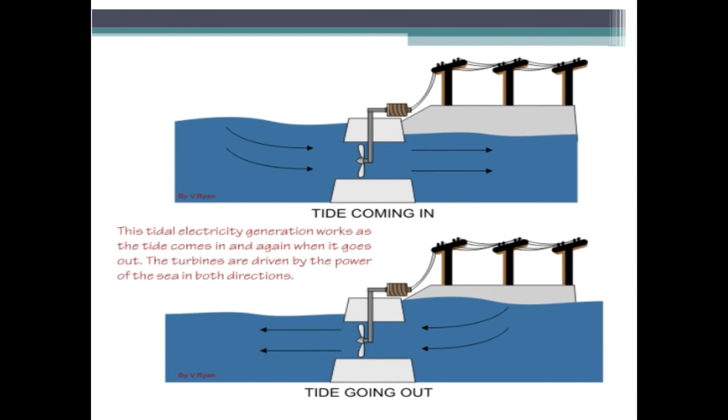So this works essentially 24/7, 365, where the water comes in, rotates the turbine in one direction, which we can use to produce electricity, and then when the tide goes out, it rotates the turbine in the opposite direction, and we can produce electricity. So tidal electricity works extremely efficiently as long as you have a high enough difference in the tide and you have a sustainable tide.

Another type of hydroelectric power, which was referred to in the first video, is known as pumped storage. And pumped storage operates where we have a lake at high elevation and then we have a lake at low elevation. And the way pumped storage works is during the day when energy costs, meaning the electricity costs, are higher, the water flows downhill and it turns a turbine to produce electricity, and then the water is captured in this low lake. And at night, electricity is used when electricity is cheap.

The energy company uses electricity to pump water back up to the top where it stores it in this high lake. And that's done using turbines that are reversible.

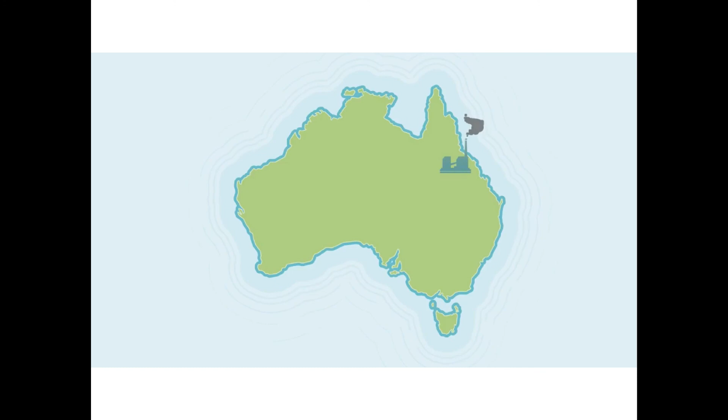Australia has a big challenge ahead with its energy supply. Almost 3/4 of Australia's energy comes from coal, which will decrease in coming decades as coal stations close down. We'll need huge amounts of new energy generation to replace it, and renewables such as wind and solar are the cleanest and cheapest option. That's where Tasmania can help.

We're looking at the potential to double Tasmania's electricity generating capacity by changing the way we use our existing hydropower system and by adding pumped hydro storage to help fill the gap when the wind isn't blowing or the sun isn't shining. Normal hydropower is created by storing water on high ground and running it downhill to spin a turbine at the bottom. Once the water's past one or more turbines, it flows on out to sea. Pumped hydro captures and stores water in two places with a steep drop in between. Water can be pumped uphill to reuse for power generation again and again.

Of course, that pumping consumes electricity in itself. That's where wind and solar power come in. Pumped hydro, wind and solar complement each other beautifully, providing a stable, reliable, clean energy system. When the wind blows and the sun shines, but people aren't using much power, excess wind and solar power is available to pump water back up into storage.

At other times, when the wind and sunlight aren't generating enough power to meet demand, the pumped hydropower system swings into action and makes up the shortfall. The whole system works together like a giant renewable battery, providing the storage, reliability and flexibility that wind and solar can't offer on their own.

Tasmania has lots of steep hills that were perfect for building hydro over the past century and are ideal for developing pumped hydro today. All this new electricity and storage would put Tasmania's energy security beyond doubt and help give Tasmanians the lowest possible power prices. And by adding pumped hydro to one of Australia's only big hydropower systems, we can build it quickly and cheaply compared to other places, even when you add in the cost of more interconnection to get our energy to where it's needed interstate. That's why Tasmania offers the stable, reliable and affordable clean energy solution that Australia's going to need.

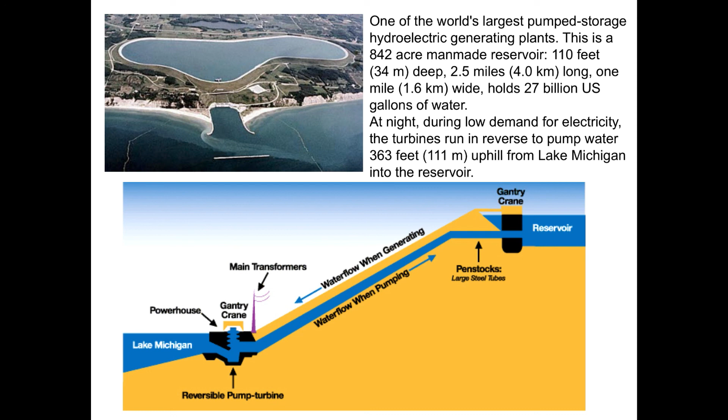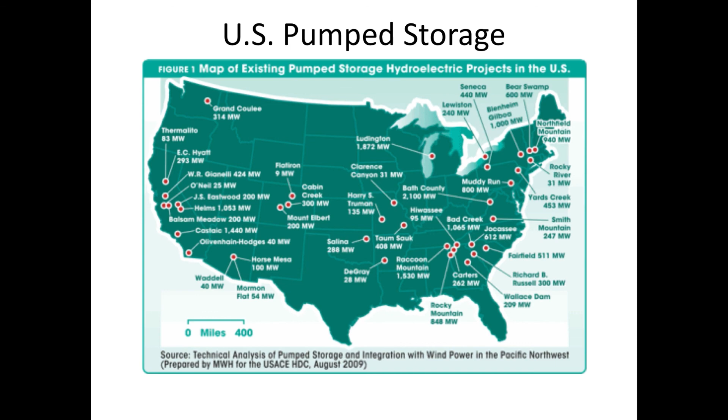This is just a snapshot. Here's Ludington, I mentioned, in the state of Michigan, on the western side of Michigan, on the shore of Lake Michigan. There are lots of these types of pumped storage facilities in the U.S. that we think of as batteries because that's how they operate.

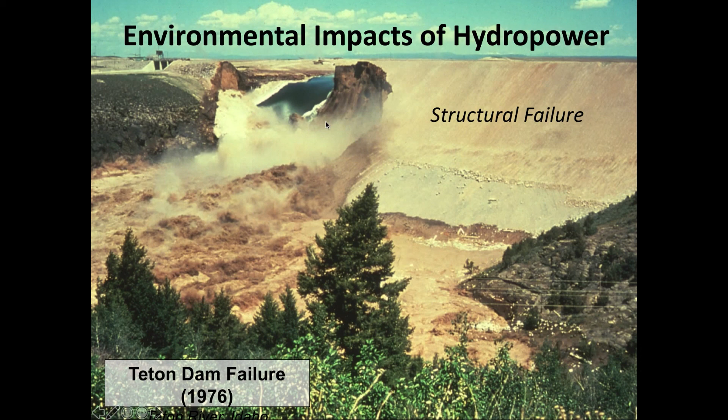So the last bit of the lecture here, I want to just talk about some of the environmental impacts. One is structural failures. So this is an image of an earthen dam in the Teton Mountains, and you can see the dam here failed, which was catastrophic downstream because not only did the water flow downstream, but all of this sediment or mud that had built up on the upstream side of the dam flowed downstream as well.

They also have impacts on the aquatic ecosystem. So this again is the image of the Hoover Dam outside Las Vegas, where the Colorado River flows downstream through the penstocks to generate electricity. In the inset on the left-hand side, the Hoover Dam is right here. So here is the Hoover Dam here in Lake Mead.

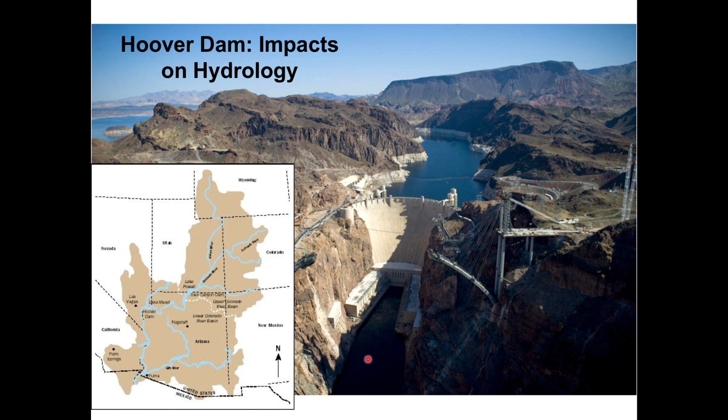And I just want to highlight that that Colorado River that flows ultimately from the headwaters in the Colorado area, as that water is stopped here at the Hoover Dam and many other dams along the way, including Lake Powell and others, the amount of water and sediment flowing downstream decrease, and that has an impact on ecosystems downstream.

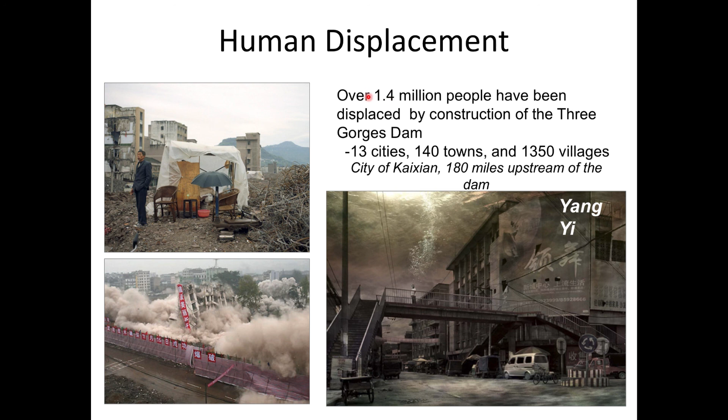I mentioned the Three Gorges Dam in China. One of the other effects also is this concept of human displacement. When you put a large impoundment dam in a river and you create a large lake on the upstream side of the dam, that floods large amounts of Earth's surface. And as a result, in China, over 1.4 million people were displaced by construction of the Three Gorges Dam. So it has a negative impact on local communities.

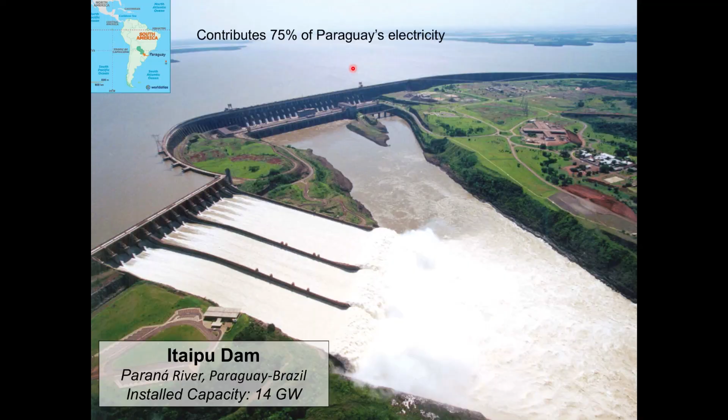Biodiversity is also affected, so I won't go into the details of legal cases that have been fought over this, but there have been lots of lawsuits where environmental groups have sued the federal and state governments, the Army Corps of Engineers who were involved in dam construction and maintenance, because the biodiversity loss has been significant.

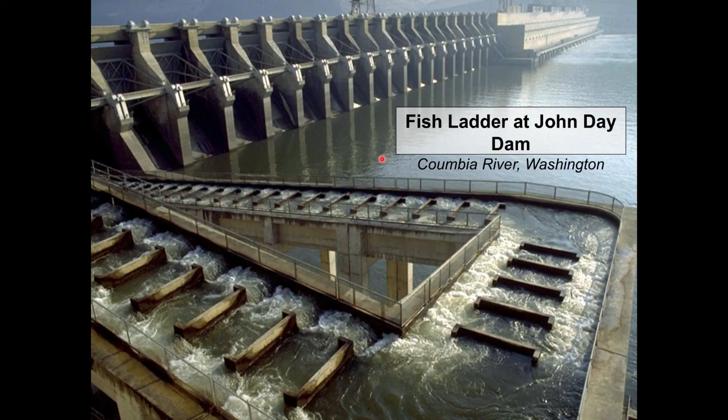I mentioned a challenge of dams in the Pacific Northwest is they eliminate the ability for salmon to swim upstream. So there have been attempts to build what we call fish ladders, where in this case, if you look at where I'm tracing with my laser pointer here, these are ladders where salmon are supposed to find their way into the ladders, and then this is almost like a conveyor belt in some way for the salmon to move up and above the dam and to continue their swimming upstream to spawn.

So with hydroelectric power, among the things that people really like is that after you build the concrete structure, there's effectively no greenhouse gas emissions. They're considered renewable. They have a very high conversion efficiency, which I didn't touch on and won't test you on, meaning of all of that energy in the water, the gravitational potential energy, about 80% is converted to electricity. Think about what we talked about with coal.

You can use it for baseload power, 24/7, 365. You can also use it as a battery, pump storage. You can also scale it. You can have small dams, medium dams, large dams, and really large dams. And they're inexpensive to operate, and they last for decades and decades and decades.

The negatives, though, on the con side, is that when you build dams, they change or involve loss of habitat. They displace people. In areas like the dam I showed you in Eritrea, climate change and the impacts of climate change on precipitation patterns and snowfall patterns can have an impact. They have high overnight capital costs, something you worked on in a recent module, those initial capital costs, and they do take a significant amount of time to construct. So lots of extremely good pros, but certainly cons, and the cons have caused a lot of people to not provide social license for their construction.

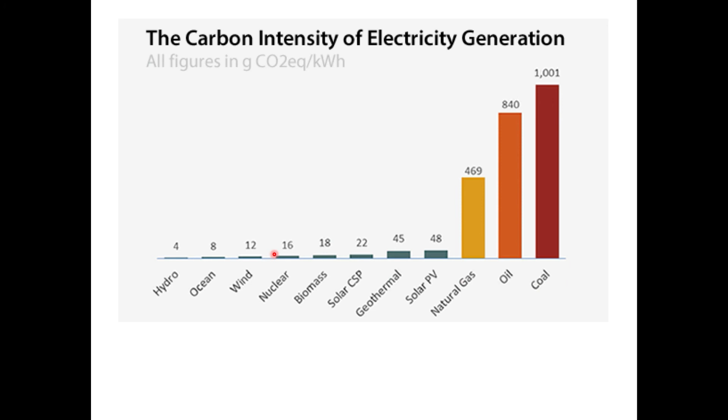So I hope today I've given you a good idea of how nuclear fuel and how hydroelectric are used to produce electricity. And in the next lecture, I'll focus on wind and solar.